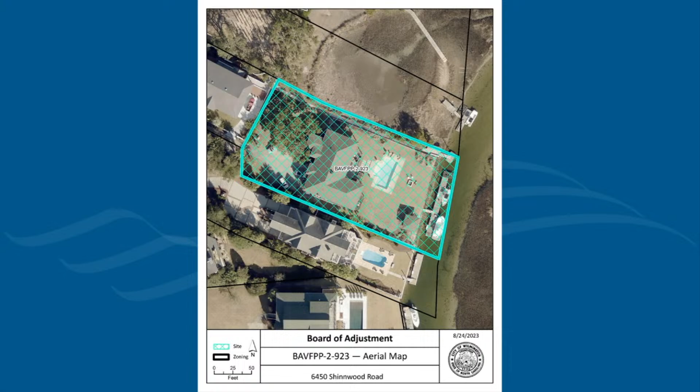This matter was continued from the October 19, 2023 meeting of the Board of Adjustment to allow the applicant time to demonstrate compliance with the Land Development Code, the International Residential Code, and the Code of Federal Regulations pertaining to the structural changes. This matter is set for hearing before you today, January 18th, 2024. I'm happy to answer any questions that you may have of city staff, and the applicant is also present to give a presentation. And I'll just go through the attachments. I'd like to submit the attachments and the case summary into the record.

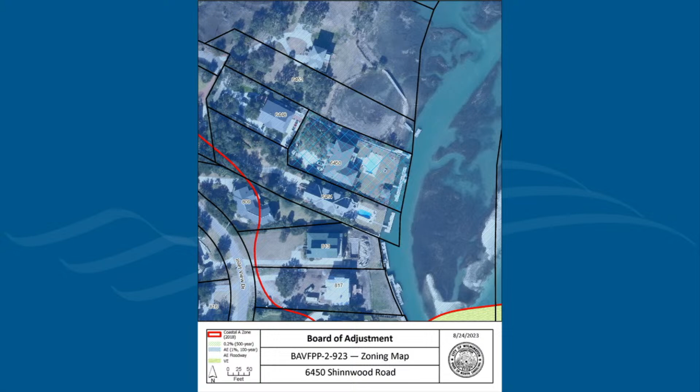Any questions of staff? Does anyone have questions of Catherine at this time? All right, thank you. Go ahead and acknowledge the applicant and the agent. Matthew Nichols.

Yes, sir. Good afternoon, Mr. Chairman, members of the board. My name is Matt Nichols. I'm an attorney here in Wilmington, 3205 Randall Parkway, Suite 104. And I'm here today representing the applicant owner, Michael Pollak. We did have a slide presentation, and appreciate the board's time this afternoon. I think the pictures really explain the request. My client's engineer, Mike Copeland with Seacoast Engineering, is also here. So I'll get right to the photos here.

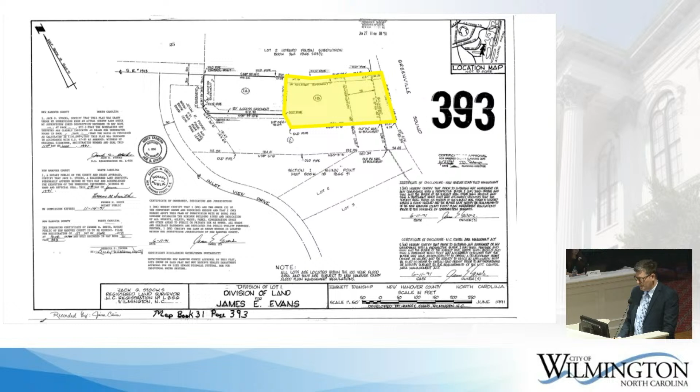And then we've got a series of photographs, and we were going to walk around the property to help explain to the board the layout of the lot, and then what gives rise to the request for the variance. There is a flood elevation certificate in the board's packet, and as Ms. Thurston mentioned, the structure is not in conformity with the current flood regulations. And one thing I'll mention, and we'll probably repeat this throughout the presentation, is that what my client's trying to do is bring the structure into compliance with current regulations, which is a really good thing.

He's planning to elevate his house, which he purchased in 2010, and for Mike and his wife Meredith, it's their primary residence. And elevate the house, get it in conformity with the current regulations. As you'll see, there's living space on the ground floor, and that's really not permitted now. He's going to get rid of the habitable space on the ground floor. So I think there's a lot of benefit to that.

And in doing so, what we're asking the board to consider is, my understanding is the code currently allows him to bring in 2 feet of fill. What he would like to do is add up to one additional foot of fill under the existing structure, and then in the immediate vicinity of the structure that would taper off. So he's not proposing to put a foot of fill over the entire lot. It's to put it under the existing structure, and then it would taper, as we'll show on the exhibit. But that's essentially the nature of the request.

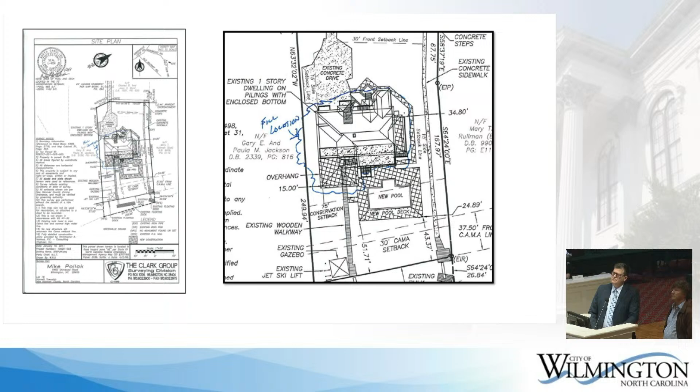This is a closer up image of what's in the staff packet as far as the fill location. Again, the vast majority of the proposed fill would be under the existing structure, which would be raised. And then there would be additional fill above the 2 feet, sort of tapering down to where it meets the allowable level without the variance. And so again, we're here asking the board to consider an additional 1 foot of non-structural fill on just a portion of the subject property.

And Mr. Chairman, I'm glad to go through all the criteria. I know that's for the board's consideration. I won't go through each of them in detail, but the main thing I would emphasize is it would bring the property into more conformity with what you would have to do today. And when you're remedying these non-conforming older houses from a floodplain standpoint, it's almost always a really good thing to do.

So I think it would meet the spirit and intent of what the regulations are trying to do, and allowing the additional fill, we would contend, would help facilitate that and get the elevated structure, it's not a new structure, but the elevated project. It would help with that, with the level of investment that's going in, to keep the water out of the house. So again, we're glad to talk about any of these if the board has a question about any of the criteria.

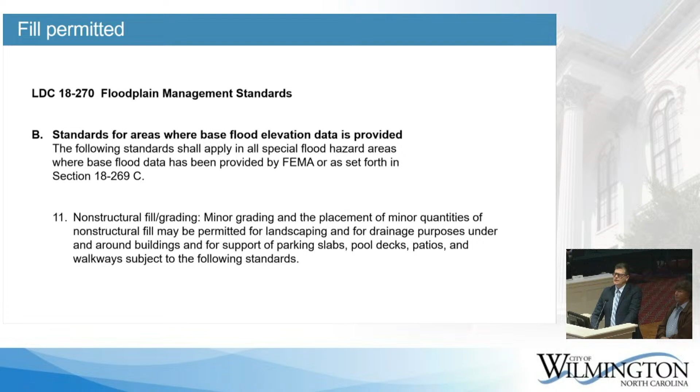This is in the packet where non-structural fill is allowed, and again, this would be just for the additional foot and limited portions of the lot. And in summary, we're going to essentially make a non-conforming property substantially more conforming, and it's going to help prevent flooding with the existing structure in the future. Mr. Pollock's asking for the minimal variance that would help achieve what he's trying to do, and it would be really in the vicinity and underneath the home. So with that said, Mr. Chairman, members of the board, we're glad to try to answer any questions.

We appreciate your consideration of the request. And Mike, do you have anything else to add? Yeah, I just want to explain the purpose of the extra foot. If you take the slab that's there now at 4.4, you add 3 feet, that's 7.4, and a 4-inch slab gets you almost to 8 feet. The bulkhead's at 6. That's reasonable. We don't ever expect to be bulletproof from any storm, but if the house was built today, that's where it would be as a minimum.

Okay. Questions for the applicant? Yeah, I have one. Have you been able to prove that it won't have a negative impact on the neighbors or the surrounding area as far as flooding goes? Could you repeat that question? I'm sorry. For the extra foot of fill that you're requesting, have you done a study that shows it's not going to impact your neighbors as far as runoff and things like that? My concern is if you're adding an extra foot, is that going to impact your neighbors negatively? We have not done a study,